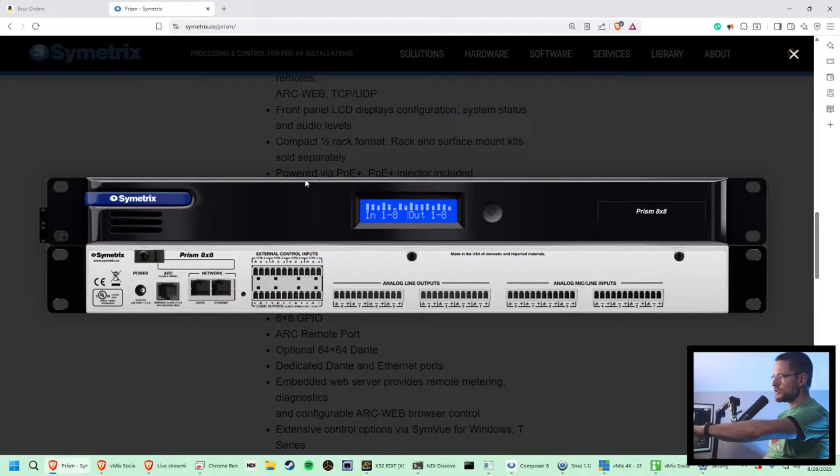I do like that this is a 1U rack mounted unit and that you have a network port and a Dante port, and it works really well for this. So this unit, the Prism 8x8, would do the same thing that we're talking about here with the Radius series. But the Radius series also has this NX option, which would allow you to add the AEC echo cancellation stuff on there. So, yeah, it's pretty great.

Also has the ability to integrate USB audio. So if you have a computer, you want to plug it in directly to this thing, then this can bring in and out USB audio into a computer. So that's very handy as well. Okay, so we had gone with the Radius version.

And just to make this a little bit, we're going to bring in Sean here real quick. He just said, hey, I picked up 2 Edge models. I'm waiting for my final course and certification. So let's just take a look at these pictures. So this has modules that you can buy. The Edge frame is the current one that's on the website, but it looks like we have logic outputs and external controls. But, ooh, these are kind of cool.

The modules that I would end up buying are the line ins and line outs, analog line outputs for the Edge cards. And how many slots? It's got 4. So then you could also do, let's see here. It's got Dante already, which is great, and Ethernet. So this product would also do what it is that I am explaining to do. So there are lots of options from Symetrix.

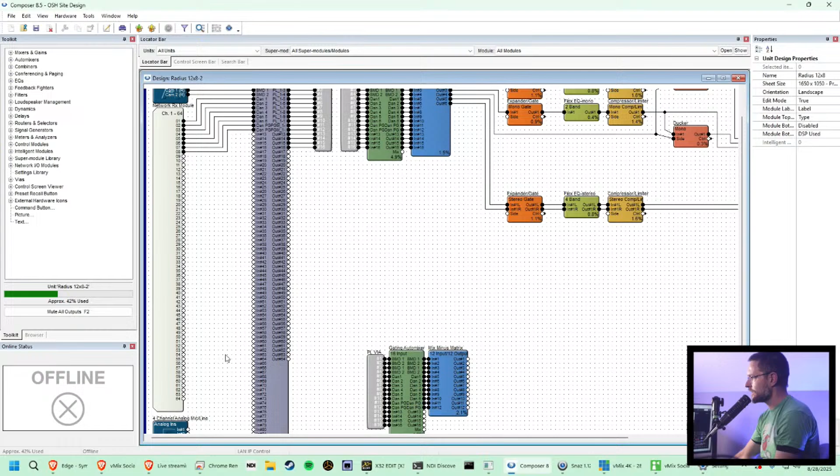Now, I looked at Doug Johnson's, how he did it. There are a few features he has that I don't, but I looked at how he did it, and then I made my own out of that. So this is me dreaming, similar to how Doug did it, but this is for my own install. So up on top, initially you have your channels, your inputs and your outputs that are automatically logged in. This machine is a 12x8, so it has 12 inputs and 8 outputs, physical analog inputs and outputs. I'm going to use the first 4, which is just Group A, as my cameras, my camera operators.

Now, when we were at NAB, we were able to talk to a guy who told us that with the pinout from Blackmagic that we have, we can integrate into pretty much any analog system, okay? That sparked a little interest in my mind, and it has yet to be proven. We're going to find out tomorrow if my hopes and dreams are correct, and I'll explain a little more about that in a second. But you can basically cross cable into any analog system via Ethernet jack.

Now, on the back of the Blackmagic Studio converters for the 6K camera line, there are Ethernet talkback ports, and online you can find on Blackmagic's website the pinout for those talkback ports, and you can create transmit and receive, positive, negative, ports that will allow you to integrate those talkback ports into a system like this. On the back of this unit, as I was showing you earlier, let me re-pull that up here. On the back of the unit, there are inputs and outputs.

Now, this is for the NX 4x4 because they don't have the Radius unit on here anymore. But I have a 12x8 essentially. So let me load this picture and then share it with you. Okay, so I've got this 12x8 without the NX, and this is what it looks like on the back. It has the logic outputs, and then it has analog line outputs here, and analog mic and line inputs over here. So we've got channels 1, 2, 3, 4. That's in bank A. Bank B is 5, 6, 7, 8. And C is 9, 10, 11, and 12. That coincides with what we see over here on this Radius 12x8. And this is bank A right here.

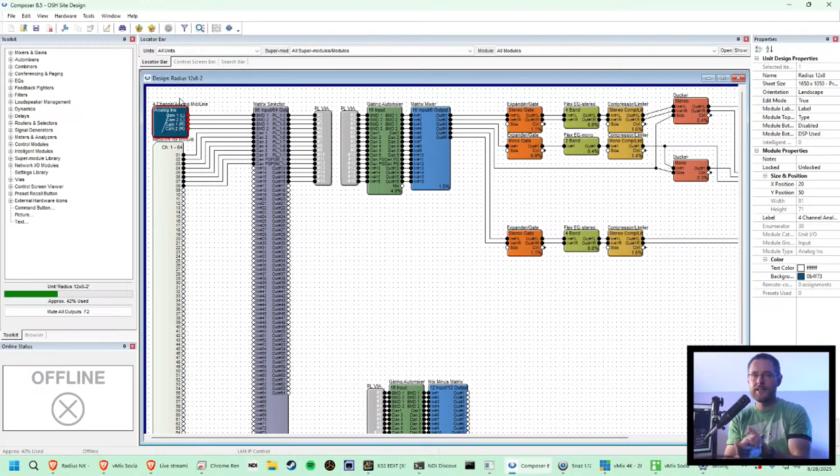So what we want to do is be able to run the intercoms along parallel with the channels on this unit, and everybody can hear and talk, and we can just plug in a headset to the Blackmagic unit.

Hey, I did the exact same thing with those connectors the other day. It took 30 minutes to find them.

Yes, I'm really hopeful that it's going to work, but I'm confident because of the conversation that I had with Blackmagic back in April that it should be doable.

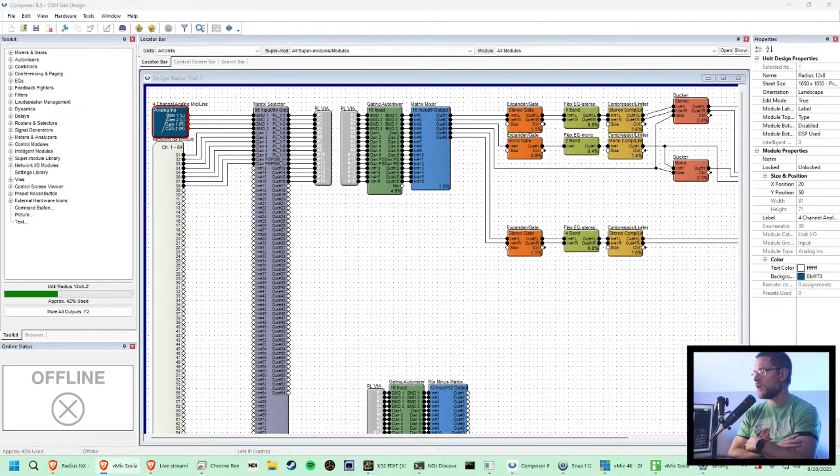Okay, so let's talk just a little bit more here about this layout, and I can walk you through what it is that I'm thinking I'm doing, and then again, feel free to offer corrections, or maybe you'll learn something.

Oh, I also need to drink my cold coffee. If only I had a mug that kept my coffee warm.

All right, so we have these analog channels here in the mic and line analog input module, and they run over to a matrix, which then brings all of my inputs into the same place.

There is also a network module, which is the Dante side of things, okay, and these are all of my Dante inputs, which is 1 through 64. Now, I have 64 Dante inputs with this radius unit, 64 by 64 outputs.

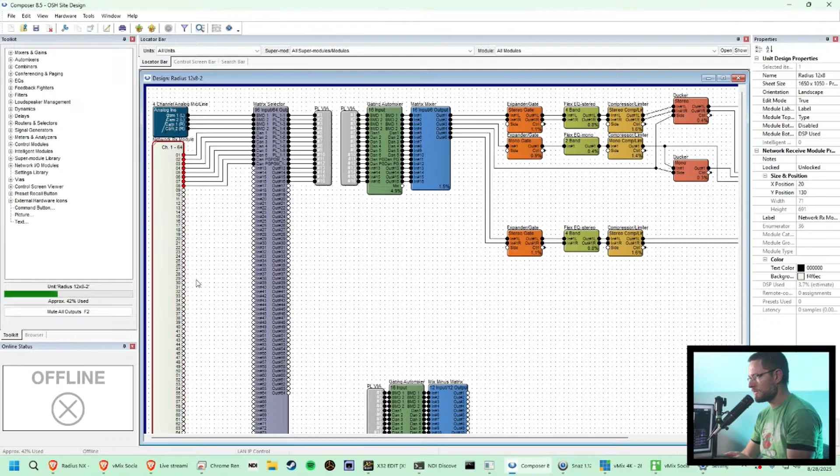And if you double click on this, what's really neat about this is if I'm sending audio over a Dante module, which I could wear a headset, I guess, and show you this. Oh, but I also need to connect it to the network. All right, let me just do this real quick. So we're going to connect.

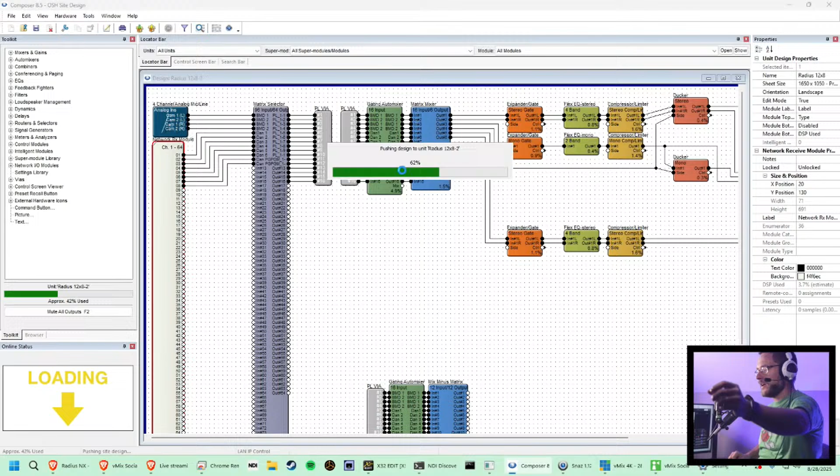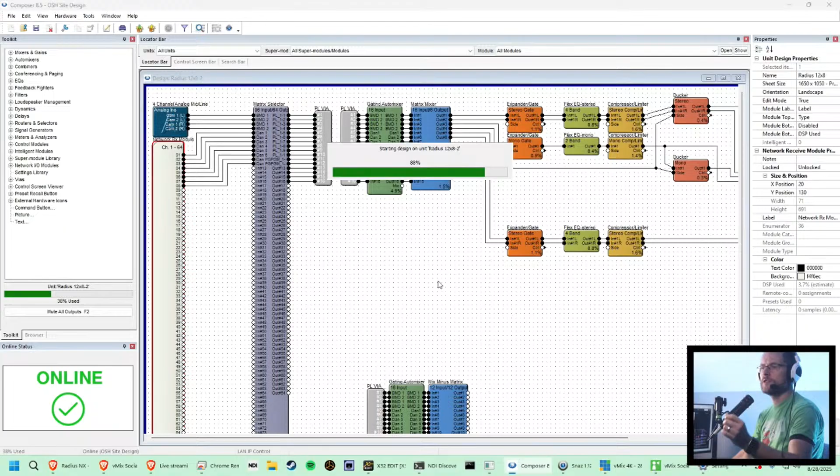And when you connect it to the network, it will show status online, which is down here in the bottom left-hand corner. I've turned my microphone on. You should not be hearing anything because this is not going in and out of my computer in any way. But as the unit powers on and I'm able to hear myself, I can hear myself through the headphones, but it's just actually from the power on the director's kit.

Okay, and then we got an audio ramp up so that we don't hurt anyone's ears. Okay, now when I click on this, I should be getting, I know why.

One moment, please, while I switch over to a separate computer and turn on Dante Controller, and I will share that in a hot second, too. There we go. So Dante Controller does need to run, and if you restart the unit, which I definitely have, then you'll need to make the connections for Dante Controller over on that machine. So we will have Dante Controller running at the soundstage, but I want to connect my talking microphone into my Dante grid. Boom, there it all is.

Okay, so the director is here, and I want to talk. We're going to go to the radius as well. So the talking channel needs to go to number 1, which is where, and I can, I'm an idiot.

Let me show you this too as to what it is that I'm doing, just so that you're not sitting in the dark. I have this remoted in. Okay, so here is Dante Controller.

Dante Controller is very simple to use. It's just a matrix system, much like that's very common inside of the AV over IP world. Actually, I think Dante Controller is the genesis of that. But here are all my channels. My transmitters are here, these are my microphones or my inputs, and then my receivers or my outputs are on this side.

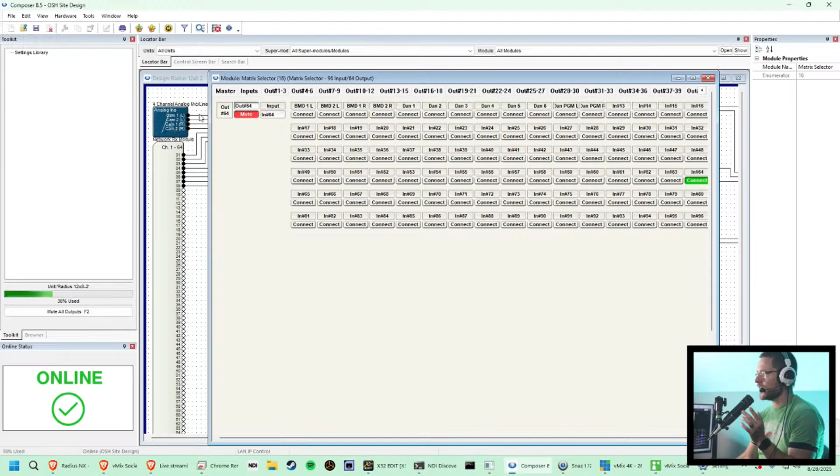And the way you set that up inside the matrix is you can customize the matrix to be as many inputs and outputs as you want. I need 64 Dante inputs for sure, and then I probably need another set of inputs for other things - computers, AVIO products, and whatever else, analog inputs, outputs. So I have selected here that my matrix has 96 inputs and 64 outputs. This can be changed at any time by customizing the module properties, and you can add or take away inputs and outputs digitally without any real issue.

So if we open this up, then you can see the connection matrix ins and outs, and it's just 1 for 1. So channel 1 goes from channel 1 to output channel 1. Let me explain this a little clearer. See how it says Blackmagic design 1? Okay, so that would be camera 1 left is in the matrix input 1 and it goes into the matrix via 1. And then we'll talk about outputs in just a minute.

So here we go, we have inputs, and on these inputs you can label them here on this screen. So here I've got Blackmagic Cam 1 left, Blackmagic Cam 2 left, Blackmagic Cam 1 right, Cam 2 right. Okay, and then Dan for Dante - Dan 1, Dan 2, Dan 3, Dan 4, yada yada yada. You'll notice here on channel 11 that this is Dante program, and that is program left, and then on 12 is program right. And then I don't really have anything beyond that yet because we're only talking about 6 Dante positions - actually 8 technically, but we're only talking about 6 right now.

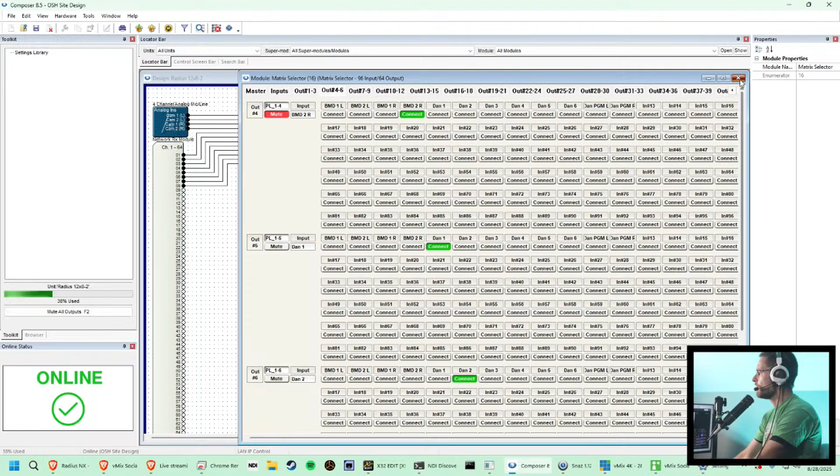You can see the PL5, which is right here, this line. PL5 then goes into a via. Now, vias are a way of transporting a signal to two separate spots in the chain. Right here we're going into via.

Now I can create as many output vias as I want. I could create three of these and have three different signal chains, or I could just do one initially. I do have a secondary one being built here at the bottom, but I haven't figured out exactly how I want to map that out, so I'm not doing anything with that yet, but soon.

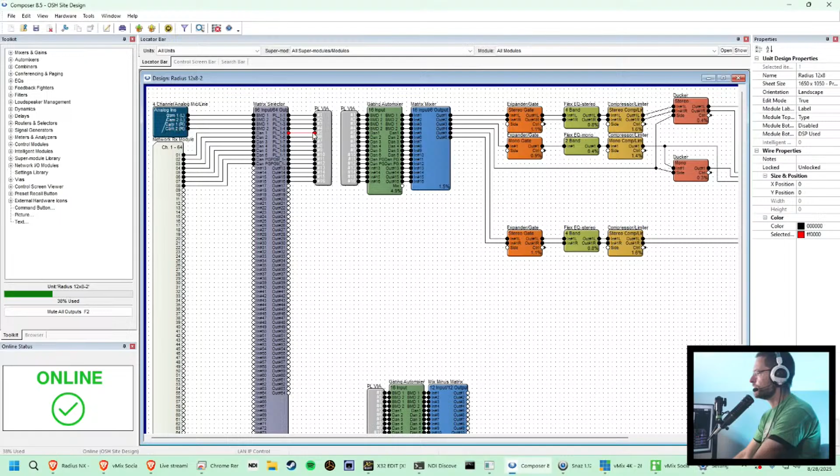So we go into a via and out of a via, which is basically just a tunnel, okay? And we had said that PL5 was this microphone input. So out of 5 then comes into my gating auto mixer.

The gating auto mixer shuts the gate on my microphone when I'm not talking. You'll notice it doesn't do anything yet because I haven't actually turned this part on. But the gate will turn off my microphone, and you can set it to a certain decibel rating. You'll notice the audio drops right off.

There's no audio when I stop talking - that audio drops right off, which is what you want. You want that thing to completely fall off.

What we can do here is set main levels for everybody in the mix, because before we were just doing input mixes. So here is the raw audio, and I'm going to try and get the audio levels to be relatively close for average talking.

What we want here is the signal to be coming in - I want to be able to see it, it needs to be in this upper range. But notice how there's not really any gain changes or anything - actually there's zero here. And so then we go into the via.

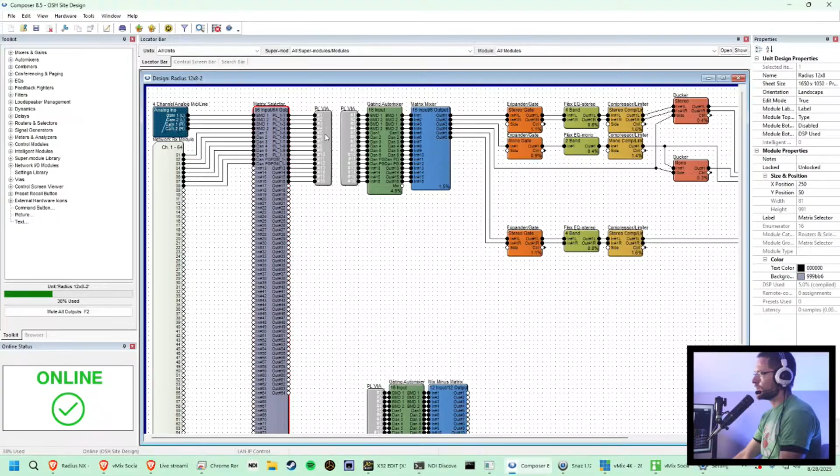The first place to really set the gain structure is here at the gating auto mixer. This will allow us to set priorities for who is talking over who. So as the director, and because my ego's so big, I want to be the one heard over anyone else that's talking. I could set my priority higher than others, but this is a good place to start doing some gain staging.

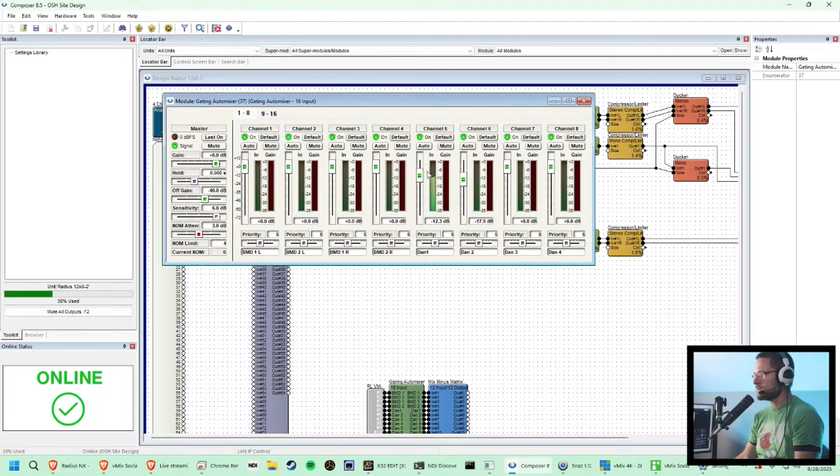So you can have somebody talking and say, hey, go ahead and recite your favorite poem or speak your favorite lyrics, and get a signal from them. Then you could set their audio level from here, and then you know you have a good baseline going forward.

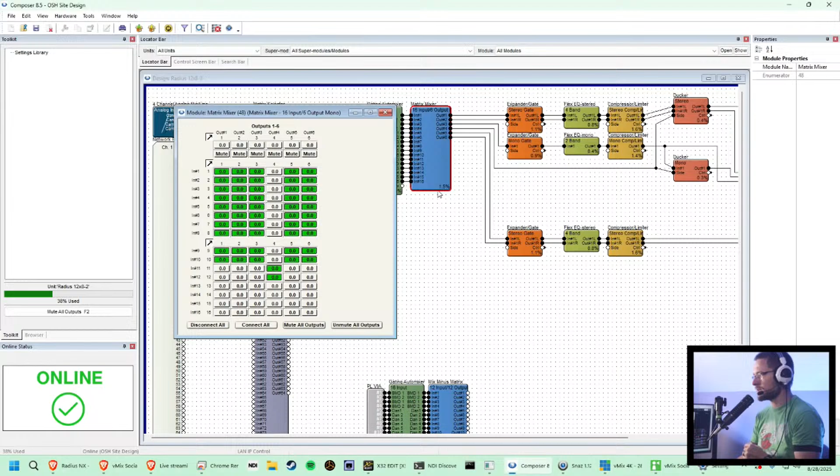Out of the auto mixer is back into a matrix mixer. What this matrix mixer is going to do is add or subtract the party line and the program audio. So it depends on what you want to do here, right? Now think of this with me.

We have - I just need to check my phone.

We have our sound guy who is listening to the stream happening on his headset. But our intercom team, if we wear closed back headphones, it's going to be hard to hear the program. So I want to add the program to the intercoms so we can all hear what is being said on stage. However, the sound guy already has that luxury - as a matter of fact, he has far more granular control because he's doing things like EQ testing and a whole bunch of stuff. So he doesn't need to hear that, but he needs to hear us.

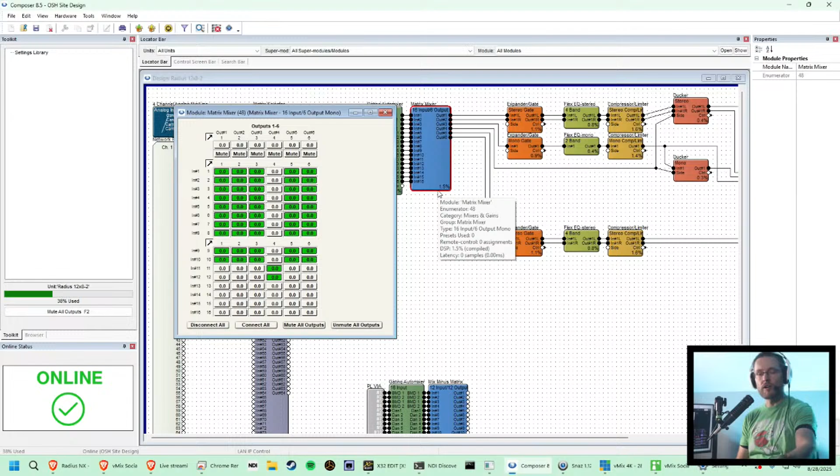Well, we need to then send him a separate mix without the program, right? So now that we have the program coming in via Dante over our AVIO product, we can select who gets to hear that and who doesn't.

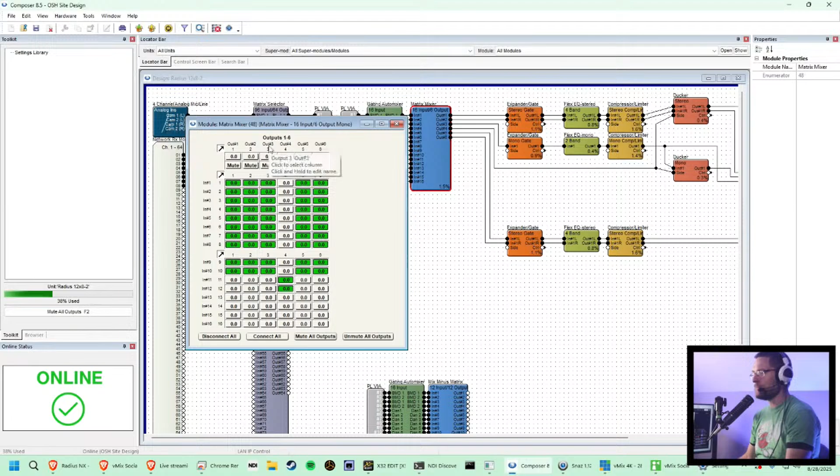So you'll notice here, then on the auto mixer, here's what's going on. Let me back out of here real quick. Yeah, so mix number 1 is party line, the full party line, the intercom system, everybody, left and right, outputs 1 and 2. Output 3 is going to be a mono mix. Okay, so it's going to be combined mono, and it's going to go into a mono system and then be outputted just mono on the output side of Dante.

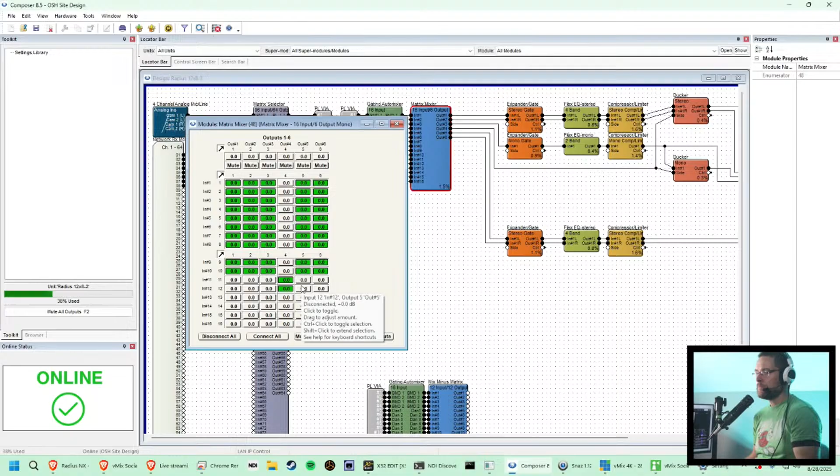Channel 4 is going to be just the audio from program. Okay, because we're going to need to be able to manipulate that audio and add it to our party lines, both mono and left-right. So outputs 1, 2, and 3. We're going to need to be able to manipulate the program audio and output that specifically how we want it, and I'll explain that in a second.

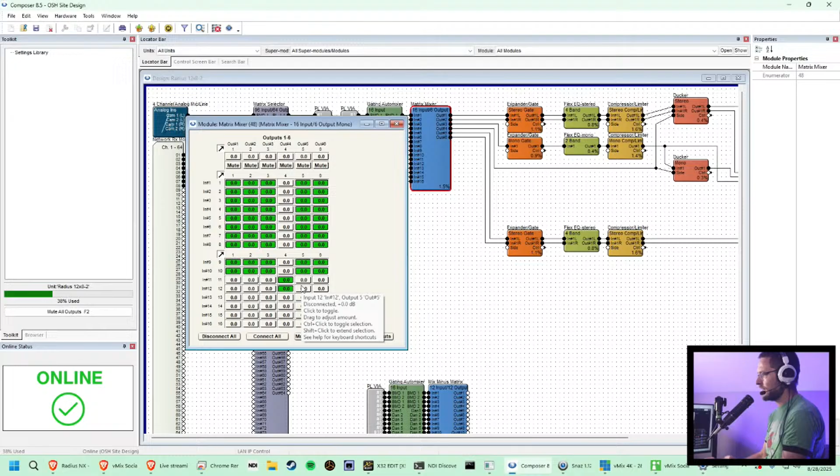And then we have channels 5 and 6, which will be, according to this, my left and right back to the soundboard. So the soundboard is not going to get program. The only thing that the soundboard is going to get is our voices if we are talking. If we're not talking, it's not going to hear any of that.

So here we go. Outputs on the second mixer, matrix mixer. 1 and 2 are party line, left and right. Output number 3 is a mono mix party line if we ever need it. It's purely as an option to integrate inside of controller. Output 4 is just program. Okay, so it's outputting left-right program so that we can integrate that down the chain into our headphones. And then 5 and 6 is going to be left-right intercoms, party line, back to the soundboard without program. Okay? All right, so moving along.

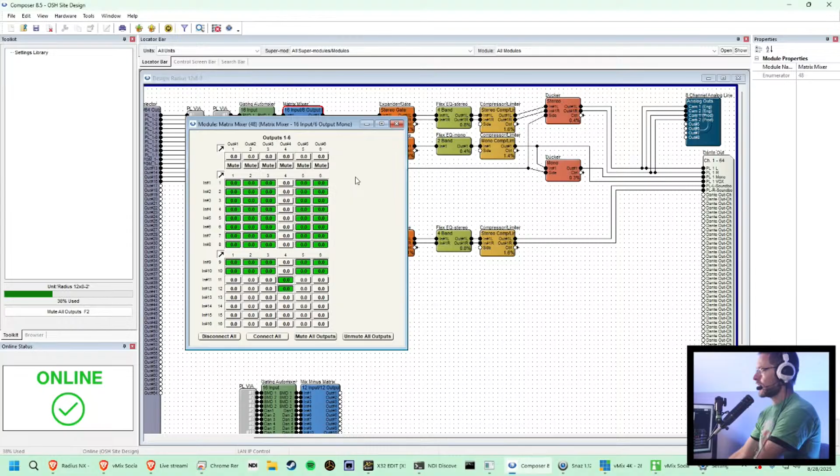So these come out of the matrix, and this is where we split off and kind of start doing some customization with what we hear in our headphones. So now we've got our signal basically ready to be heard and then headed towards the outputs. So the left and right is the one that I'm listening to right now, and that is outputs 1 and 2 out of this blue matrix. This goes into an expander and a gate. And this gate, as you can see, shuts off, closes when I stop talking.

And the beautiful thing about that is if you have a hypersensitive microphone, or you have wind noise or an air conditioner, or rack noise, which I definitely have. We have rack noise inside of our booth at the soundstage. This will close that noise off, so that my headphones and the other people in the party line cannot hear it. Now, this is a general left and right signal that when no one's talking, the gate closes. Okay, and you can see that happening in real time.

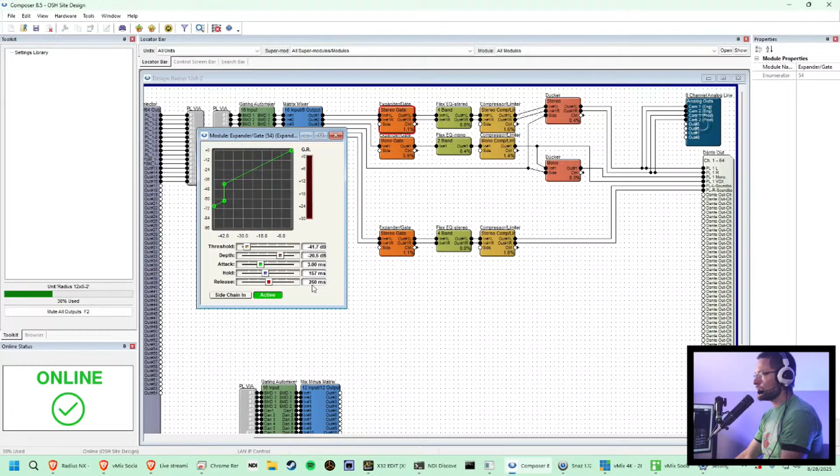All right, then. I've set these parameters to what I think will be needed, but we're going to adjust these probably in real time once the system gets up and running and we get comfortable with it. But you'll notice that the gate has a very quick attack at 3 milliseconds. It holds for like 150, 160 milliseconds, and then it releases a bit slower so as not to cut off my words, but to catch everything that I say. So it's not clipping, and I'm not losing words because the gate stays open long enough. Okay, so there's the gate.

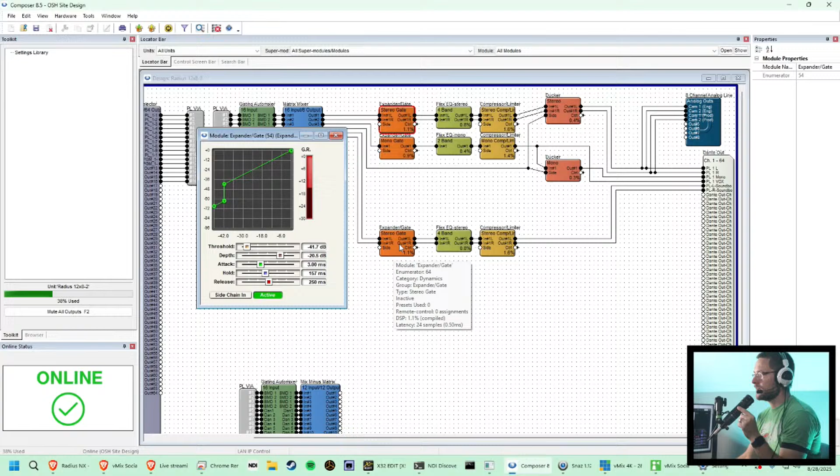Now these settings are copied between the stereo, the mono gate for output 3, and the gate here that is for the intercoms going back to the board. Okay, so these settings are all duplicated, and you can actually duplicate the module and then just make the wire lines that you want. So that's pretty cool. So the expander gate is then the gate. I'm not using it as an expander at all, but the gate is active at all times and makes my headset go dead, and that will be very important for the next down the chain.

Now the next thing, again, which are all duplicated, is our EQ. And something that I desperately needed to learn, maybe not you, with intercoms is it's not sound like on a stage or out of a speaker. Intercoms is about clarity, right?

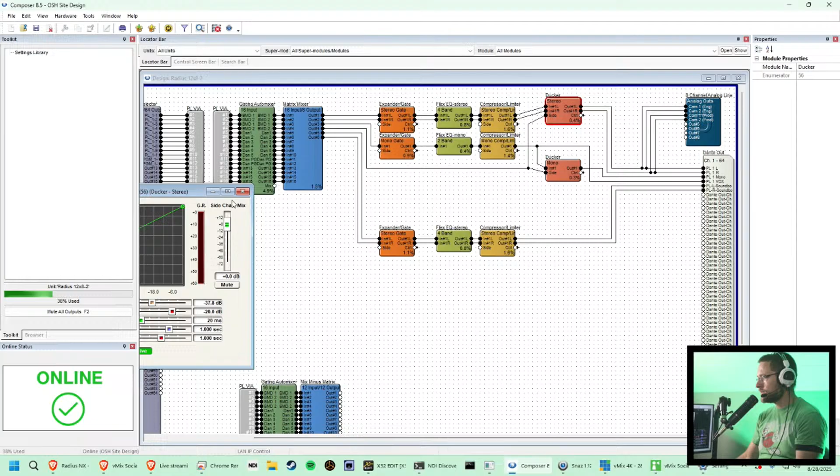And what that does is when I talk, the program audio will go down, not disappear, but will go down, and my voice will be crystal clear over top of it. But then when I stop talking, after a second or two, depending on what you set the release at, the ducker will open up again, or will close the gate on here, and will increase the volume of the program.

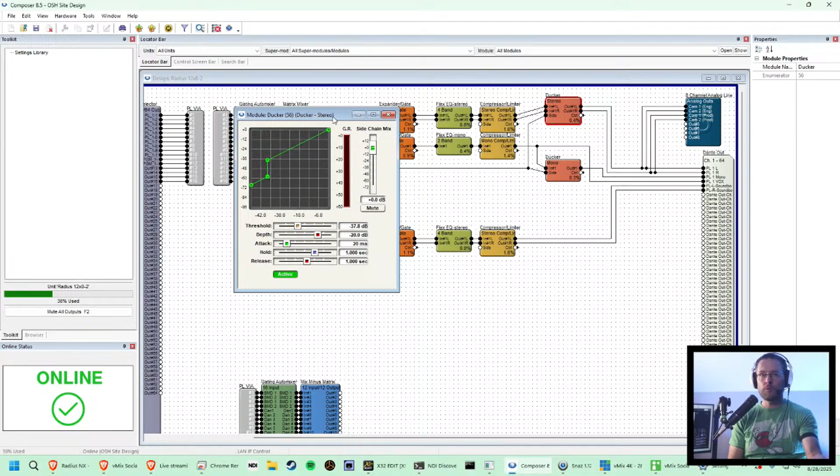And so the program will then be the dominant thing that's happening in our ears. But when I talk, it will bring it down so that I can be heard, which will be really kind of a cool feature that we haven't been able to have up until now. And this is one of the most exciting parts of this integration.

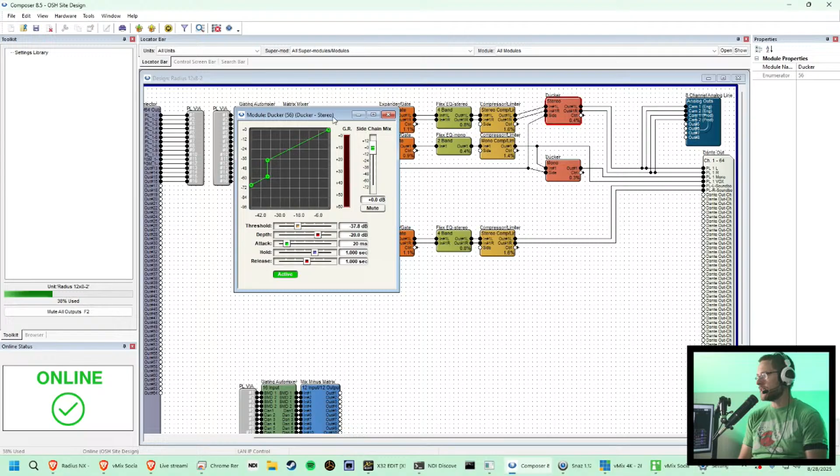Again, with the Dante AVIO unit, we're going to be able to bring in program left and right, bring it down to a single channel, send it over to the ducker, and then the ducker is going to do that. And then out of the left and right channel, kind of the last thing here on this chain, out of the ducker, which is left and right, we then come over and we go to the camera outputs. And so we go cameras 1 and 2, and then we go party line 1 left and party line right.

Okay, and now we have Dante out, right? So Dante out is what this looks like. And oh, look, we can see what channels are receiving the audio. Now we have channel 1 and 2, which is party line left and right. That's what I'm talking on right now. That's what I want to hear. And then we have 3, which is our mono line, 4, which is a Vox line. And again, I'm making these for future purposes, but we have a Vox line. And then we have our soundboard, which is 5 and 6. And so that's me talking, but no program audio on that one.

And you'll also notice that we have 64 outputs in Dante. And so we've got this huge grid that we're going to be able to use when we're ready to kind of go live. Now let me bring up the workflow. I'm going to save this again. Yep. So here is all of those channels, right? So this is a little confusing with the radius open, but with the radius like this, you can see all the 64 transmit channels, and you can see all the 64 receive channels inside of the DSP. That means I basically have about 55 open channels in the DSP that are Dante that aren't doing anything right now, but that are available for routing when we go in that direction.

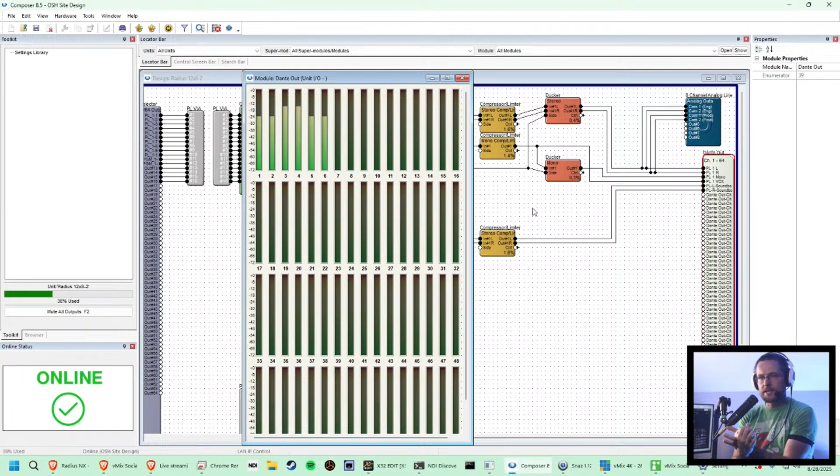By the way, inside the Radius, there are two network ports. From what I can tell, there are two settings. There's a switched setting, and there is a redundant setting. When I set it to redundant, it seems to screw things up. But switched means that you can run dueling Symetrix units and connect a patch cable from secondary Ethernet to secondary Ethernet. And if they're both in switched, the Symetrix will act like a network switch and send the network data to the secondary switch.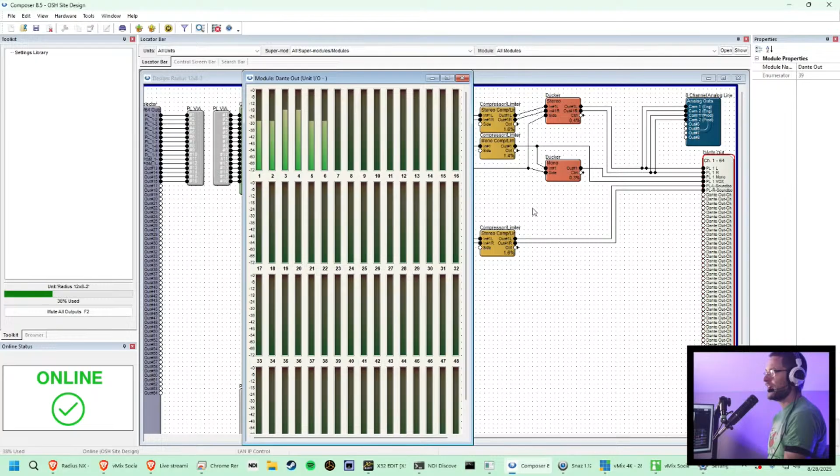So if you have multiples of these stacked, like say we have multiple conference rooms, we run a hotel, maybe we have a church that has multiples of these, you can daisy chain them together so they can all see each other, and then they communicate together, which is amazing. So that's really well thought out, and I love that feature. Okay, so I'm going to turn off my microphone. And there is the signal chain between my Dante inputs and my outputs for how this is going to work.

Now, tomorrow, I am planning on going over to the soundstage and doing this hard install, which means we're going to have to run some cable. We bought green Ethernet cable to signify Dante network, and we bought a 4250 that is a 24 port. These are two 8-channel banks with a couple of fiber ports. So we have 16 ports that are PoE, and the bottom row of those ports are all going to be Dante. So when I look at the switch, I know exactly what I'm looking at because the bottom row will all be Dante. Now, this is a 300 watt PoE switch.

These little body packs are all PoE straight. They're not PoE plus, so they're all less than 15 watts. I think they're like 6 watts running, which is nothing. They generate very little heat, so they're appropriate to put on your hip. One of the features that I really like is not only does it have this little talkback button that lights up green when you turn it on, but these left-right dials, left ear, right ear, you can push them in to protect them so they don't change. They give independent audio control. So say your headphones are too loud or too quiet, you can turn them up or down on your own.

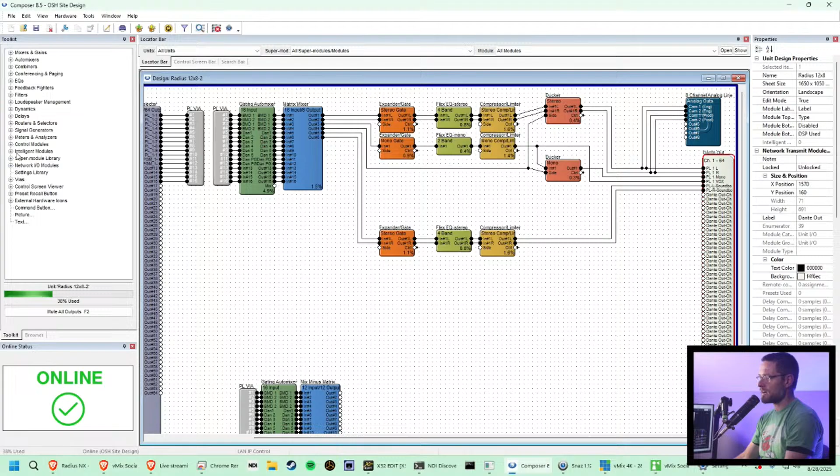So I love the clarity. I love the ability to manipulate the EQ of the intercom. I love the option that perhaps I can split off everybody's microphone and EQ each of it individually if I want. There are so many options. Oh, and by the way, I glazed over this, but I didn't even talk about this. There are so many modules in here, like hundreds of modules that Symetrix provides as a part of the product.

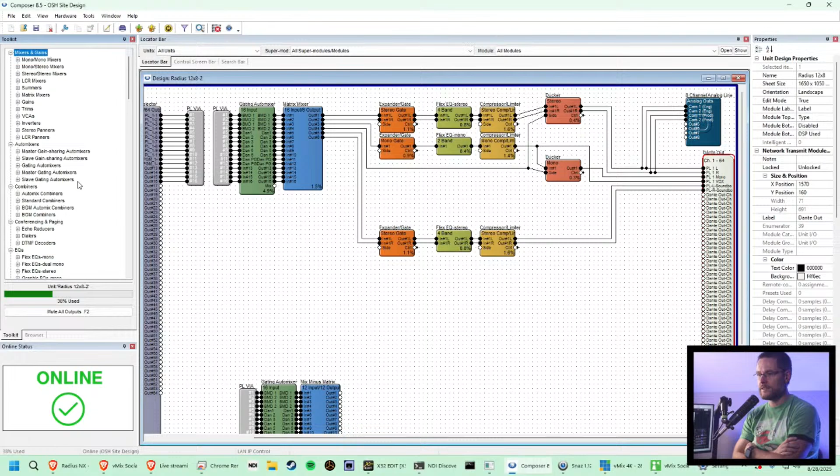And when I booted this thing up, apparently this particular unit was sitting in a closet for a long time, and the guy was like, I don't need this anymore, I want to sell it. So he sold it to us, and when I logged in, it said there's a huge update that can be done. I did that, and it added a bunch more stuff. So amazing. I love the fact that there are so many options. I haven't even gotten into every single module that's in here, but under the direction of Doug Johnson's video, Doug Johnson Productions, I was able to basically figure this out and set it up and get it going.

One of the things that you've got to remember, though, is here we're designing it, and then you have to push it to the product, right? So then you push it. Well, once you push it and it says online, now we're actively monitoring this, right? So we are able to see the audio channels.

If I turn this on, you'll probably see the audio show up on channel 1. That's just being picked up by my microphone here on the desk, which is over here. And if I mute it, it shows that audio channel is off.

So this is watching this live. But if you make a change to it, it disconnects because you have to re-upload. You've changed the workflow, so if you add a module or whatever, it'll say offline again, and then you have to reconnect it, which is called go online. So really simple, you just save your design, and now it's up and running.

You don't have to have Composer running. You don't have to have Dante Controller running. Everything is connected. As long as the computers keep going, everything is connected and should continue to work.

So it's been a fun little project. There's so much more to investigate and figure out what is going on, so much more to discover. There isn't an actual echo reducer module in the original Radius, so if AEC is not something you absolutely need, what I'm explaining here would really fulfill the needs.

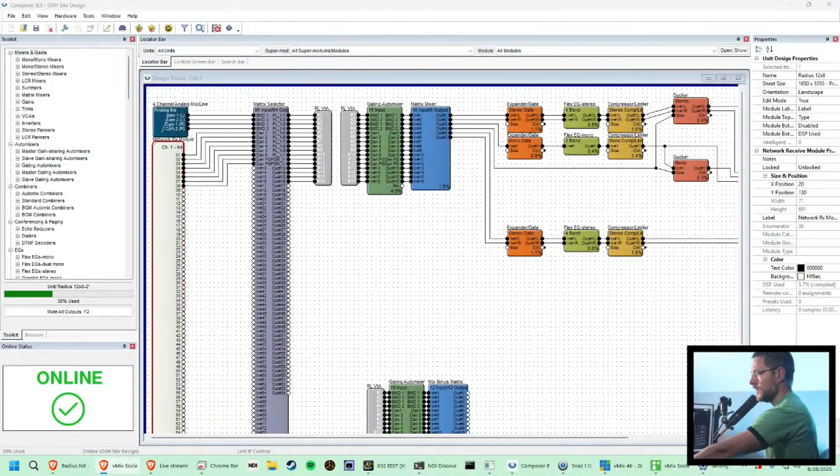Oh, one thing I do want to show you. Here on the - remember when I said it's kind of confusing, all these lines and everything? Well, what you can do is highlight one of them. So I know that my director's input is Dante 1. I know that this wire is my audio from my headset, and I want to see where it goes in the signal chain or where it gets stopped.

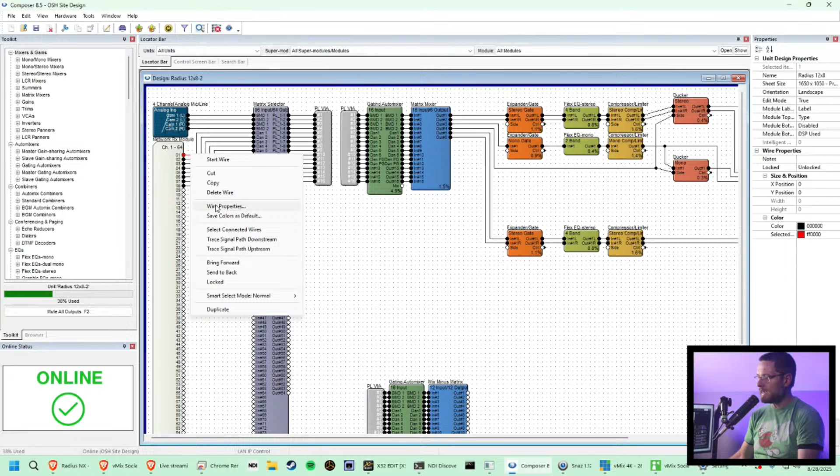I can right click on it and say trace signal path downstream, and it shows me everywhere that Dante signal goes. That's stinking cool, because now I can see, okay, we go into DAN 1 on the matrix selector, which goes out party line 1-5, which goes into the VIA.

Oh, and you'll notice down here the second VIA - see how it's lit up 5? So it's duplicating that, right? Comes out of the VIA number 5 into DAN 1, into the gating auto mixer, and then out of DAN 1 into matrix mixer input 5. But then it goes out, outputs 1, 2, 3, 5, and 6.

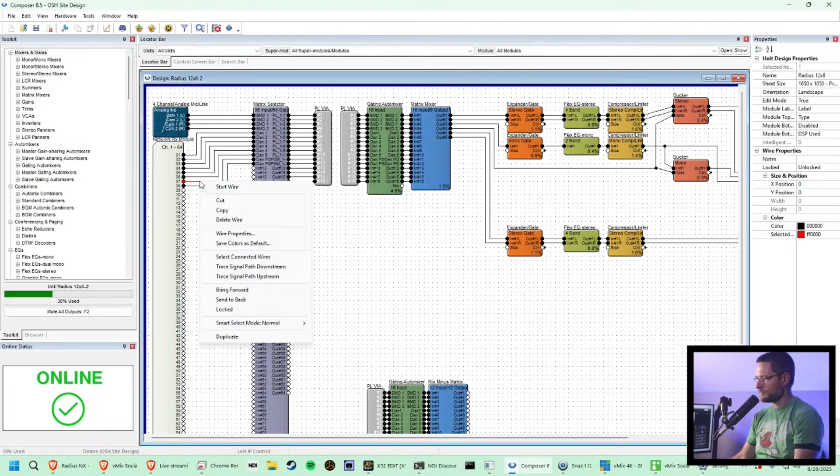But if I do the same thing for channel 7, which is program audio, and I say trace downstream, you'll notice that it only goes out. It follows this path, comes out number 4, and goes into the duckers, which ends up going into the outputs for the party lines, but not for the lines that are going back to the sound booth or the soundboard.

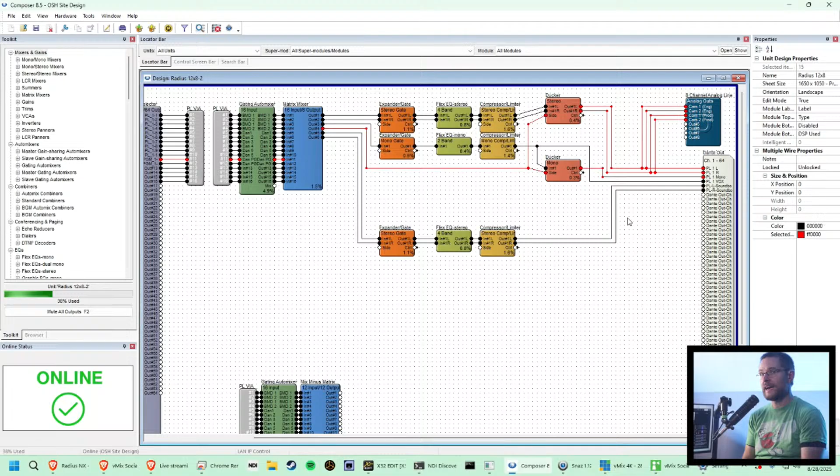So that's how you can verify after the fact, okay, have I traced this correctly? And then you can find out where the problems are. It's a beautiful little thing.

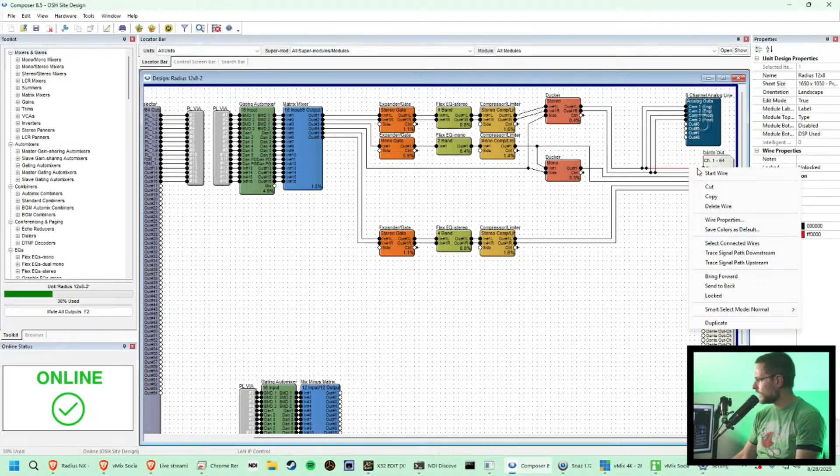You could also say, for example, if I want to know who is going to get party line 1, you could trace it upstream, and it will light up all paths that are getting party line 1. So party line 1 is coming out of 1 and 2 — these modules are currently not being used — and 7 and 8. Party line 1 is hearing 1 and 2, 7 and 8.

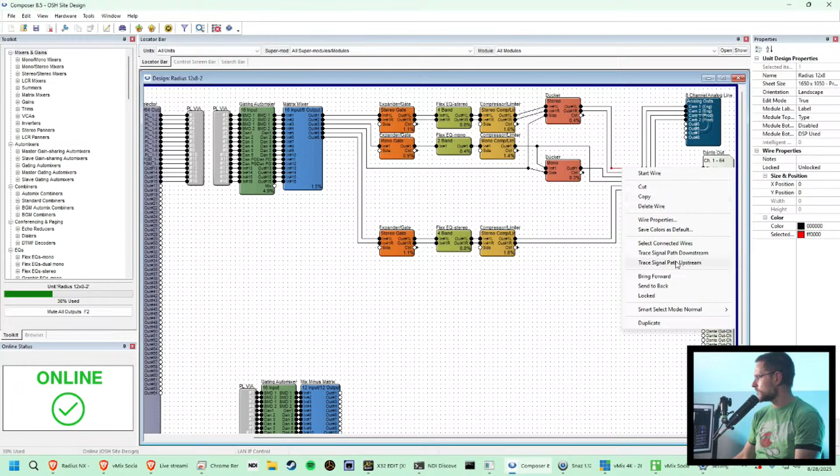We also need to, inside this matrix mixer here, inputs, party line 1 — let me look at that one more time, because I think maybe I've got a problem here. Party line 1... oh, this wire right here. Trace it upstream. There we go.

So these lights should also be lit up, though. That cameras 1 and 2, 3 and 4 should be going into party lines. Oh, hang on, trace this downstream. Yeah, see, this is going nowhere. So inputs 1 — oh, that's because they're muted. So here we go.

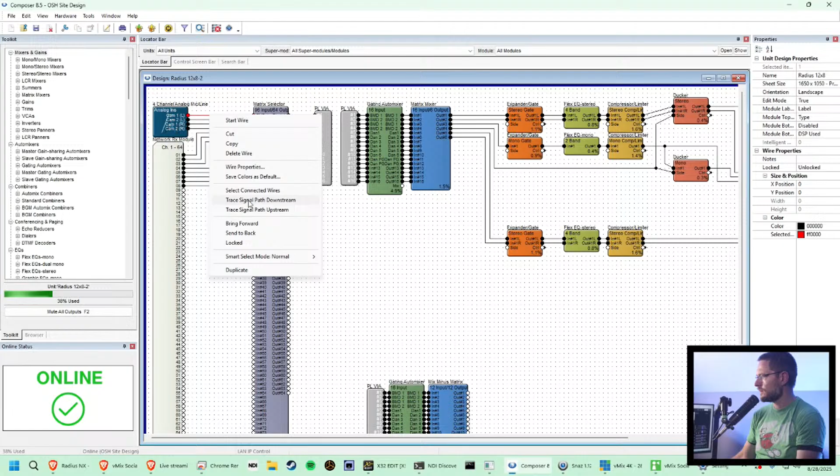3 and 4 unmute. All right, let's try this again. Trace it downstream. Yeah, there it goes. So just because they're muted — and you'll notice that camera microphone left, camera 1 mic left, is going to all of the outputs, which is what you want with your microphones.

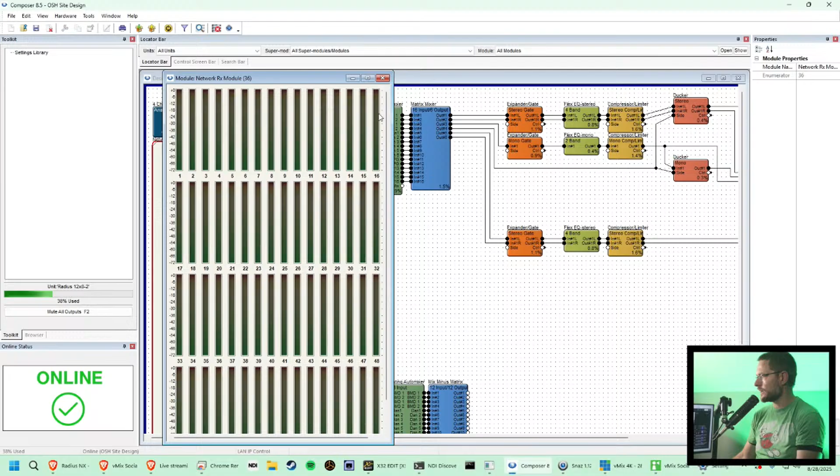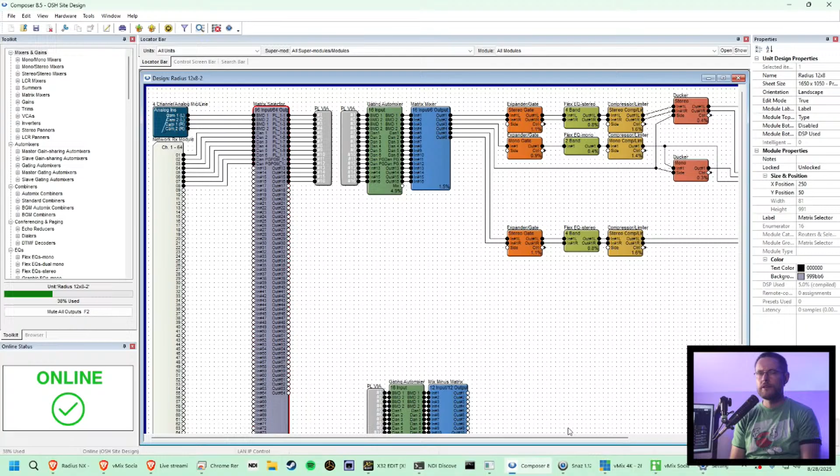But that also explains what's going on in here, because these are also muted. So Dante 3, 4, 5 — those channels aren't going to be used right away, we've got to buy products for those. So I have them muted here so they don't go out. That's pretty cool — you can trace it and find out, hey, just like what I just did: my Blackmagic camera analog inputs are not being received on the party line. Why is that? Well, it showed that it stopped at the matrix because the matrix has those channels muted. So boom goes the dynamite — you can easily figure out where those problems lie.

Okay, well, that is the show. That's everything I wanted to cover today. Next week I've got some stuff coming that I might change the topic for. I'm not too sure, but I've got some stuff coming that we should probably look into, and I can bump the multi-channel recording video since we've talked about that recently — I can push that into a future week or two.

But we've got a couple things coming up, one of those is my vMix caller layout, and how it is that I am auto-switching audio through mix buses to make that all happen based on triggers. I'm going to do some more testing to make sure that it's working correctly — it's a little tricky when all your sources are in the same room, it's very confusing. So I'm trying to do some testing with a friend of mine, and then we will maybe show that on a show.

There is also, like I said, the controller for the Omada network — I want to do an overview of that once it comes, because I think it's a solid product, and if it's a standalone unit, that means I'm not going to have any issues integrating it with my network here at home. And we need to talk about the developments of the garage, which should be going up in the next 2 weeks, and what my studio is going to look like over there. So this image is going to change in about a year when I move into that office, and of course developments as that goes along, we'll include those here on the show as well.